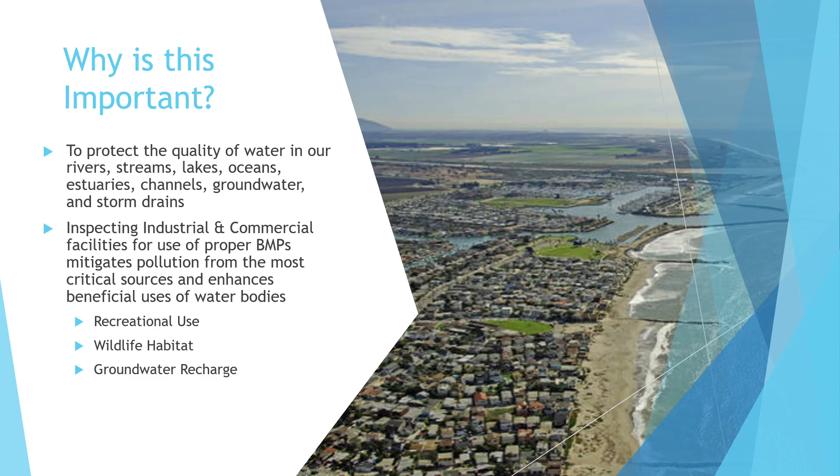The MS4 system is our municipal separate storm sewer system. As the MS4 implies, it's separate from our sanitary sewer system, meaning that water collected is not treated before being released back into the environment. This includes anywhere stormwater can flow. Channels on sidewalks and roads, irrigation ditches and creeks, inlets, catch basins, and storm drains are all part of the MS4. That's why most storm drains are labeled Do Not Dump, because they drain directly to surface water.

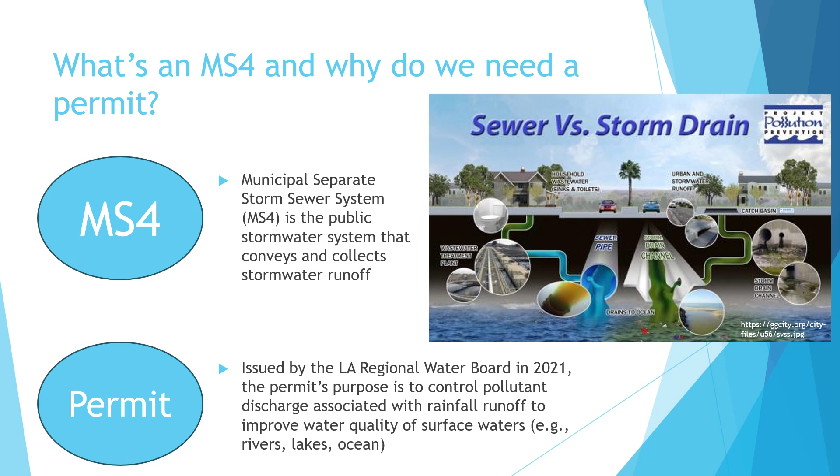The Los Angeles Regional Water Quality Control Board issues us a permit to regulate the release of that water and sets rules to monitor and improve water quality. We inspect industrial and commercial facilities specifically because they have a potential risk of pollution. We're there to look for signs of possible pollutants leaving the site. Inspectors educate operators and check that facilities are implementing stormwater management practices. These practices, also known as best management practices, help prevent and reduce non-stormwater discharges. Inspections are required every 2 years for commercial and industrial facilities, with some exceptions that will be explained later.

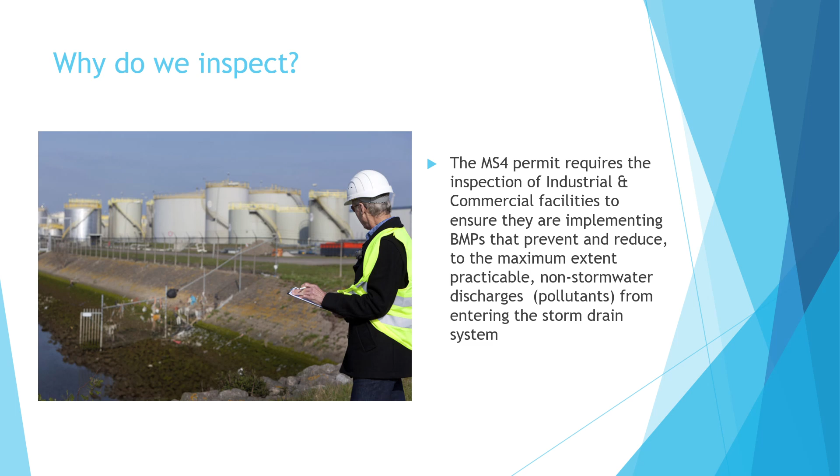The MS4 permit defines the categories of industrial and commercial facilities to be inspected. Generally, all industrial facilities and some commercial facilities like restaurants, gas stations, nurseries, and auto repair shops and dealerships must be inspected. Any other facilities that may contribute significant amounts of pollutants to our storm drains must also be inspected.

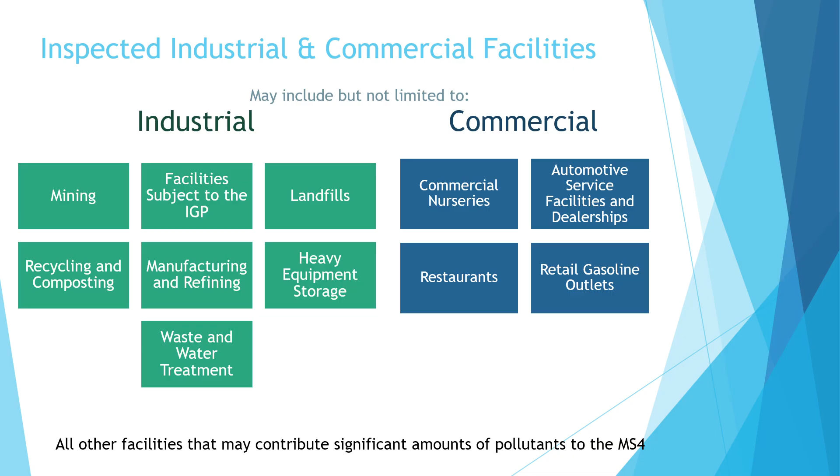As an inspector, you may need to be familiar with these terms, as they may need to be filled out on the provided inspection forms for commercial and industrial facilities. A notice of intent is a permit application to the State Water Quality Control Board for coverage under a general stormwater permit, such as the Industrial General Permit. To complete an NOI, a facility needs a stormwater pollution prevention plan, which includes actions for the facility to take to prevent pollution from entering stormwater and requirements to monitor the runoff of stormwater from the facility. After submitting an NOI and SWPPP, a facility is provided a waste discharge identification number by the state.

Some facilities may have a no exposure certification, which means the facility is not exposed to stormwater, but periodic inspections may still be necessary to ensure that they are not exposed to stormwater. Finally, a notice of non-applicability is an exemption from the general permit coverage due to the facility being disconnected from polluting storm drains or engineered to contain all stormwater runoff on site. These facilities may still need to be inspected to confirm their submission of a NONA to the Water Board, ensuring their engineered controls are properly functioning, and confirm that they are not releasing any pollutants to our storm drains.

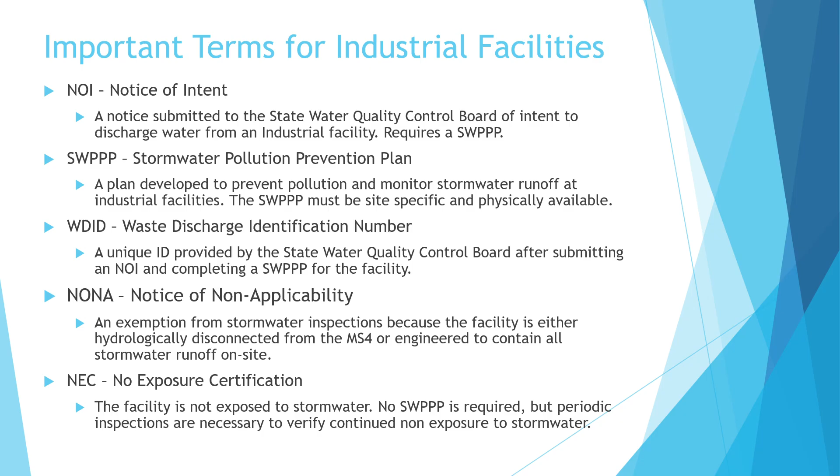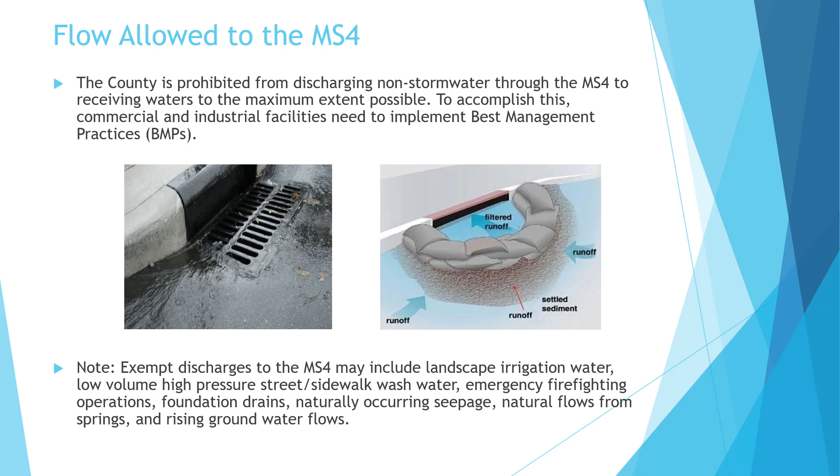Flow allowed to the MS4. Only stormwater runoff is allowed to flow into stormwater drains. There are some exceptions made, like emergency firefighting operations, naturally occurring seepage and flows, and landscape irrigation water. More specific exemptions can be found in the 2021 MS4 permit. The county is otherwise prohibited from discharging anything that is not stormwater to receiving waters. To reduce pollutants from entering our storm drain system, the permit requires commercial and industrial facilities to implement BMPs.

Best Management Practices, or BMPs, is a term that describes a wide variety of temporary and permanent devices, procedures, structures, and plans for a facility. As an inspector, it's your job to be aware of these categories of BMPs and be conscious of them as you're inspecting a facility. On the form provided for each facility, you will need to check BMPs present at the facility to ensure that they are being implemented.

The following types of BMPs are the minimum requirements for each facility, and other BMPs may be present on top of these minimum requirements. In the next slides, these BMPs will be explained further, with photos showing examples of BMPs being implemented properly and improperly.

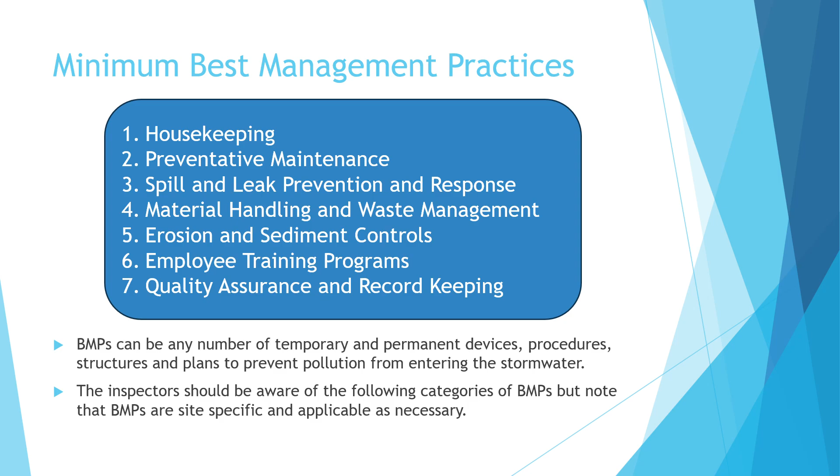Housekeeping BMPs. The concept of housekeeping BMPs is to keep things tidy. This can be done by making sure spaces are kept clear of trash and clutter is organized to prevent the spread of pollutants from their locations. Preventing material tracking, such as oil spills from automotive shops or materials from leaving an industrial manufacturing plant, also falls

under good housekeeping. As you're inspecting a facility for housekeeping BMPs, generally look for clean and tidy workspaces, materials covered and stored that could be readily mobilized by stormwater, and minimal stormwater discharges from non-industrial areas that come into contact with industrial areas.

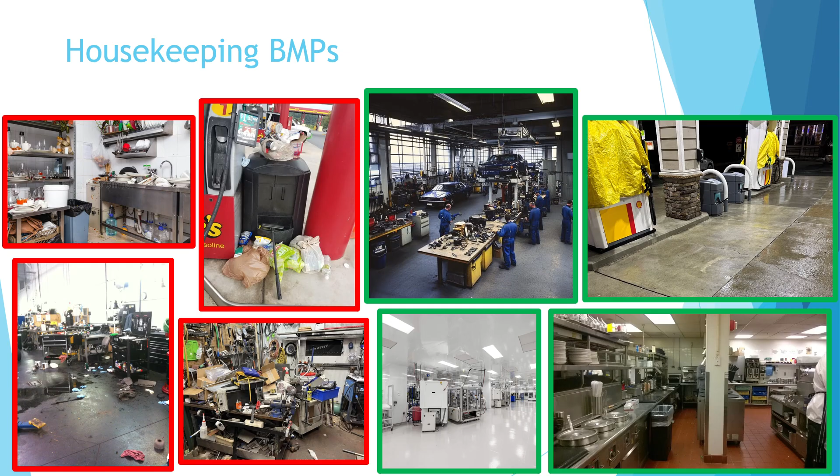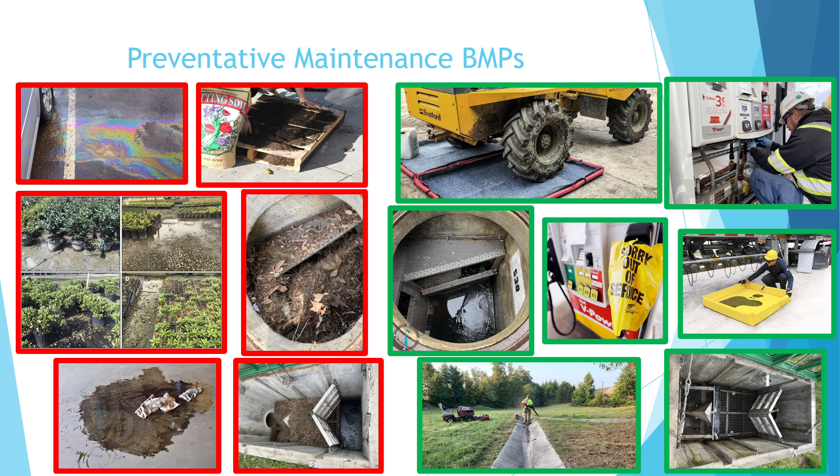Preventative maintenance in a nursery would look like sealed containers for fertilizers and pesticides, sweeping dirt and leaf litter, keeping equipment under cover, and containing stockpiled materials. At a gas station, preventative maintenance could mean checking pump handles for leaks, ensuring covers over the fueling stations and trash bins, and sweeping the fueling area.

Spill and leak prevention and response BMPs. Potential spills and leaks can be obvious and are a good indicator of poor BMPs. Checking locations where common leaks occur, such as pipe connections, valves, gaskets, seals, and storage bins are a good place to start. While you're at these sites, if you notice stains on the ground, oily equipment, and wet or dripping pipes, these are good indicators that further investigation is needed.

Check that they have the proper equipment to prevent and respond to any possible spills of materials. Common BMPs may include spill kits that are tailored to site operations, barriers, pallets, storage crates, sawdust or sand, kitty litter, and other absorbent materials.

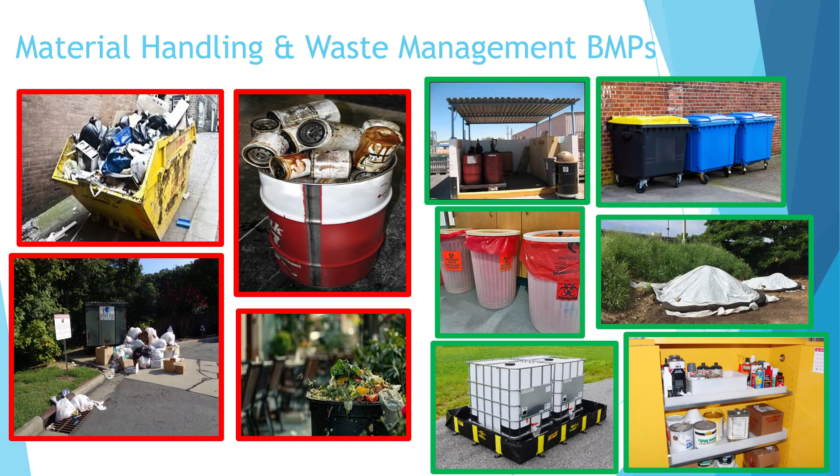Material handling and waste management BMPs ensure materials and waste do not wash or blow away. All materials entering and leaving the site should be contained and stored properly. This includes the minimization and prevention of handling and storing materials and wastes that can be easily moved by contact with stormwater. The photos on the left show poor material handling, which leads to pollution of the MS4, even showing an overflowing trash bin with trash covering a storm drain.

This kind of material handling is not acceptable and will lead to pollution. Materials handled and managed properly do not create opportunities for pollution of the MS4. By checking for covered materials and waste storage containers, you can determine if a facility uses proper material handling and waste management BMPs.

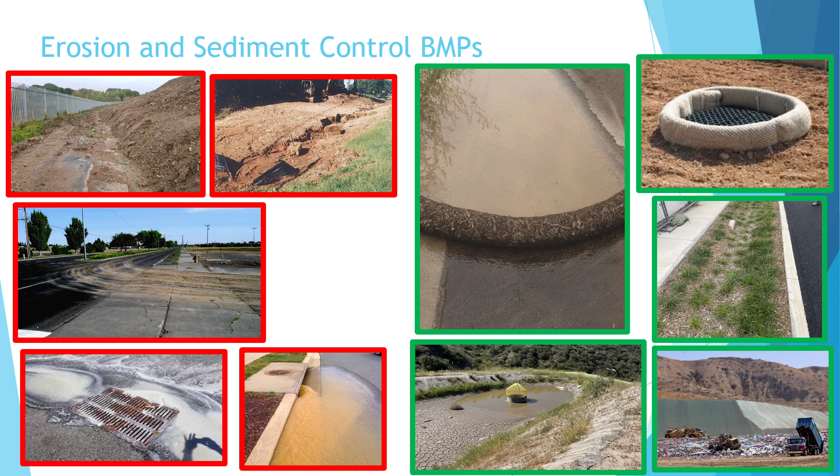Finally, employee training and quality assurance record keeping BMPs. These BMPs are important at the facility to ensure all staff understand how to verify BMPs on site are implemented properly. These BMPs are hard to inspect, but asking for records of previous inspections, BMP information, annual trainings, and the SWPPP if applicable, will give you an understanding of the facility's quality assurance and record keeping, as well as their training standards. Combined, these two minimum BMPs can create an environment that ensures other BMPs are used and maintained by the facility.

Moving on from the minimum BMPs required at commercial and industrial facilities, we have permanent structural BMPs, otherwise known as advanced structural BMPs. During inspections, you may need to look at infiltration basins, vegetated swales, and filter drains, some of the more common structural BMPs, to ensure that they are maintained and functioning properly. In the slides that follow, the BMPs will be explained and shown in photographs for your help in identifying them in the field.

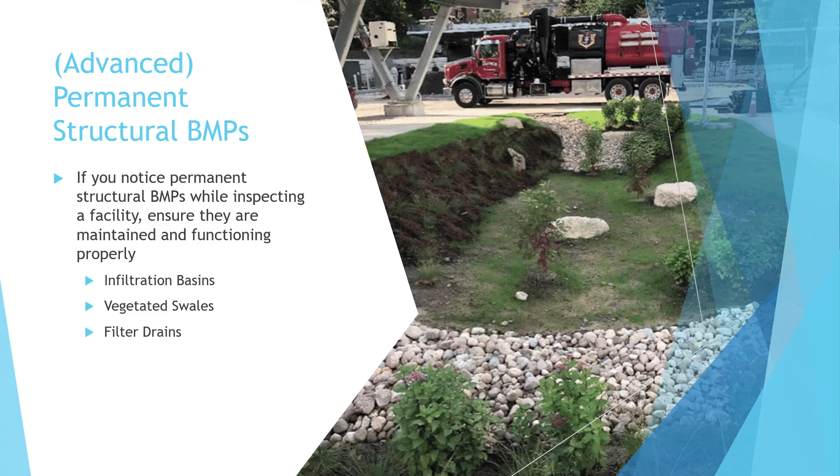Infiltration BMPs. An infiltration basin is a relatively large impoundment that is designed to infiltrate stormwater. These basins can create a capacity for the storage of runoff to collect and give it time to percolate through the soil. Through infiltration, the pollutants in the stormwater are filtered and water is ultimately recharged into the groundwater table.

You should inspect an infiltration basin for any buildup of sediment, trash, debris, and damage. These things can impact the basin's ability to transport and infiltrate water, which can lead to standing water. An infiltration basin should not have any standing water unless there has been a storm at the site in the past 72 hours. Other infiltration features can include permeable pavement and underground infiltration chambers.

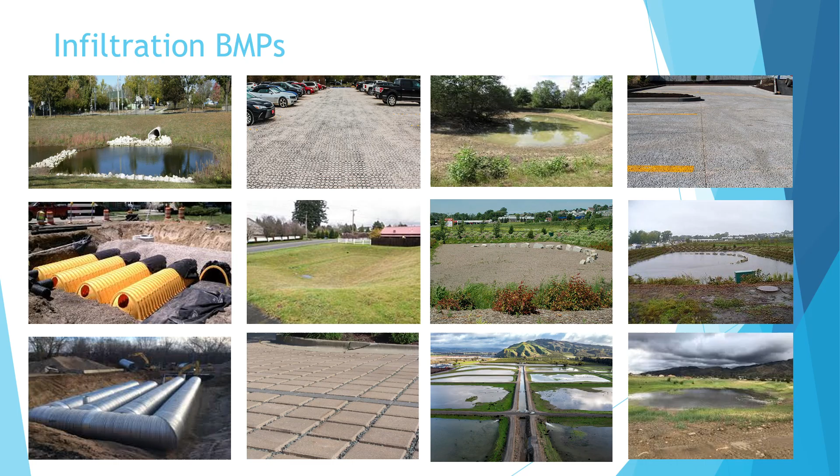Vegetated swale BMPs. Vegetated swales are open, shallow channels with dense vegetation covering the side slopes and bottom that collect and slowly direct runoff flow to a downstream pipe. It's important to ensure vegetation is healthy and maintained all year. They treat stormwater by filtering water through vegetation in the channel, the subsoil matrix, and/or infiltration into the underlying soils. Vegetated swales may be found in small landscaped portions of industrial or commercial facilities.

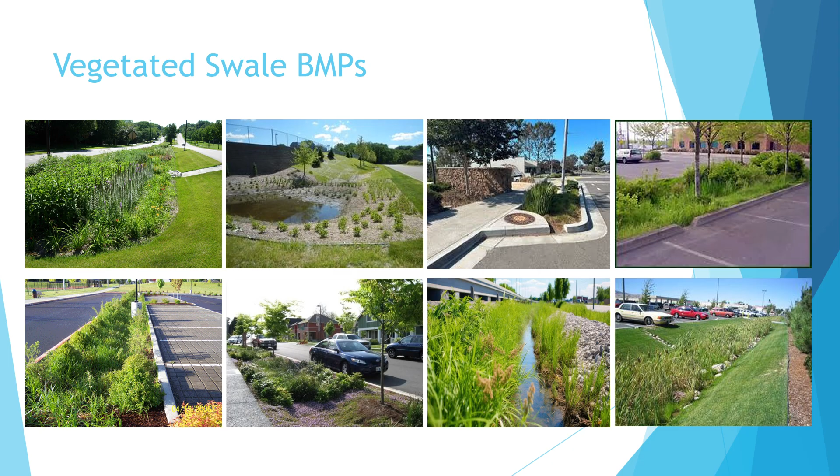When inspecting a vegetated swale, look for signs of erosion, damage to vegetation, channelization of flow, trash, litter, and areas of sediment accumulation. Ensure the commercial or industrial facility is maintaining the vegetated swale during the dry season by mowing grass, irrigating the swale, providing weed control when necessary, clearing litter and other blockages, maintaining the inlet spreader, and repairing any damaged areas within the channel.

Filter drain BMPs. Filter drain BMPs are used to remove pollutants at the point of entry to the storm drain system. There are a multitude of inserts of various shapes and configurations, including baffles, baskets, boxes, fabrics, sorbent media, screens, and skimmers.

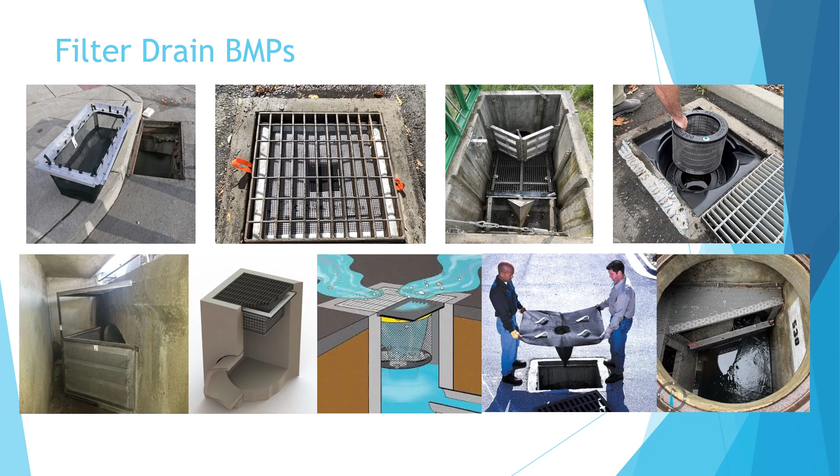Routine inspections and maintenance are required for filter drains to function properly and to prevent the resuspension and discharge of the accumulated pollutants. When inspecting a filter drain, check for pollutant loading of sediment, trash, and other plant materials that may be blocking stormwater from entering the drain. Also look to see if the filter drain was installed correctly by checking if stormwater flows around the filter or through it as it goes down the drain.

By inspecting industrial and commercial facilities, you are helping mitigate potential pollution from critical sources. If you would like more information and training about stormwater management, including the requirements for inspecting all facilities, the MS4 permit, and more, please go to the County Stormwater Program page of the Ventura County Public Works website. For more information about BMPs and their maintenance, refer to the CASQA Industrial and Commercial Handbook, or contact the County Stormwater Program.